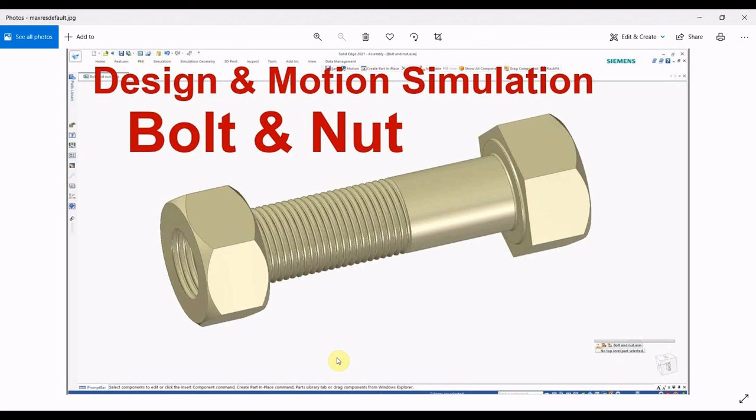So let's go to our topic. Today we are going to do the design and some motion simulation of a bolt and nut design in Solid Edge software. So let's go into the topic here. So here we are just starting the Solid Edge software. Then at first go to New, then go for New, and the

Let's go into the topic here. Here we first go to the ANSI metric option, then go to the ANSI metric part option. Here is the Solid Edge 2020 window. We can make the model in synchronous, but I prefer to do it in ordered. So let's go to the ordered option.

Then first make all the planes visible. Then go to the sketch option and click on the plane option. Okay, here we are perpendicular to this plane. Then I am just going to make one sketch. Please watch carefully. I am going to make this sketch here. Okay, that's 90 degrees, that is showing.

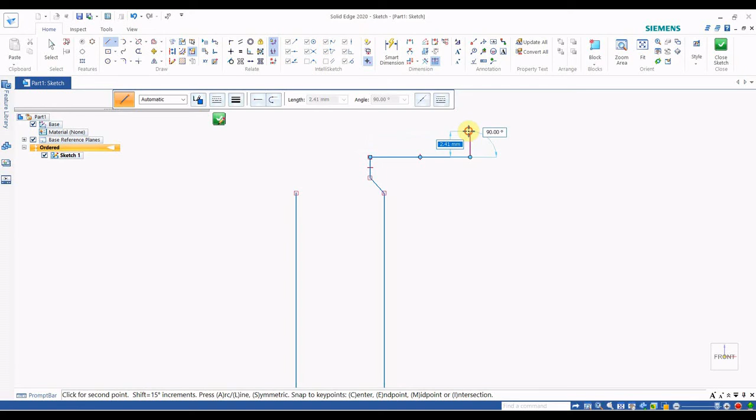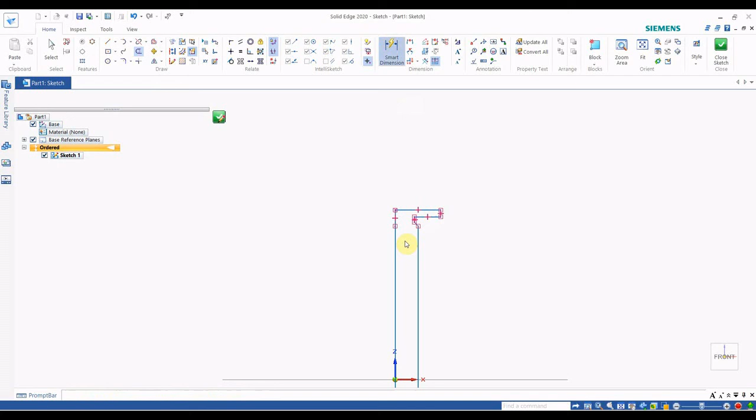After that, just make this type of sketch, and I'm just making this, and here I am just joining this part. Then I'm using the trim option here. Now it is time for giving the dimensions. So here I am giving the dimension here.

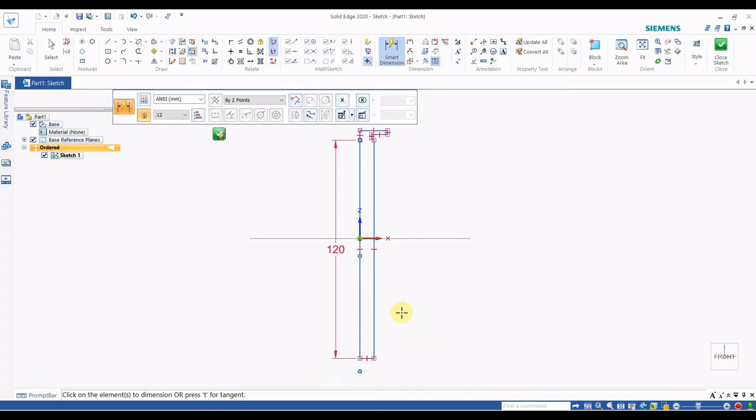Please hold the shift key and the mouse middle button to move this drawing in the window. So here I am giving the dimension 120. Here I am giving this dimension also 120, and this dimension is 10. That is for an M20 bolt.

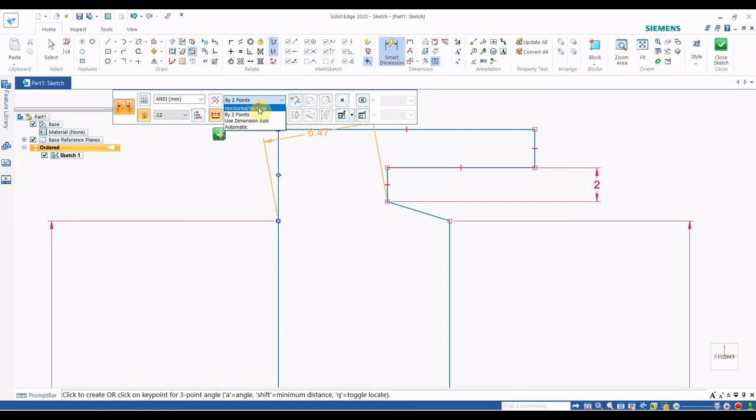Then I am giving this dimension 2 millimeters, and giving this dimension, sorry, what's the problem? I'm giving the horizontal or vertical. This dimension is around 8 millimeters. Okay, then I am giving this dimension around 5 millimeters, and this also becomes automatic with that.

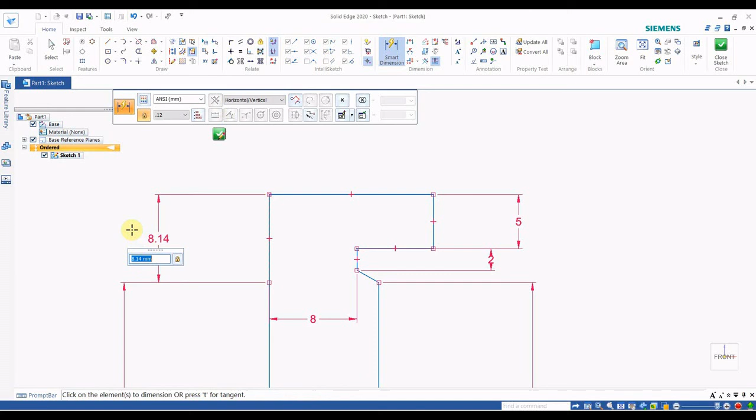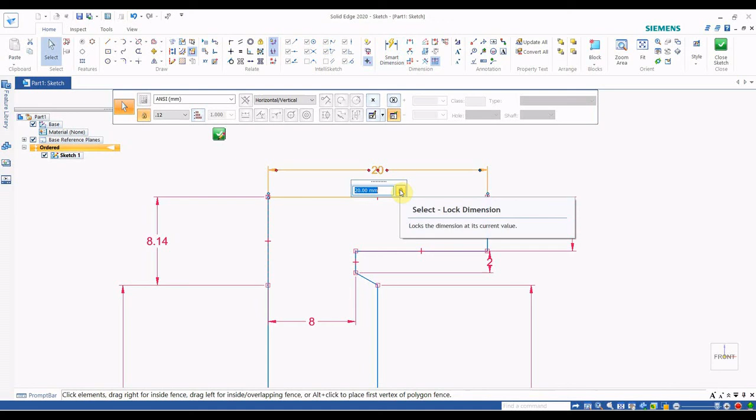And then I'm giving this dimension, the head dimension, around 20. No, 20 is very small. Giving this dimension around 50 millimeters. No, 50 is very large. One minute. I'm giving this dimension

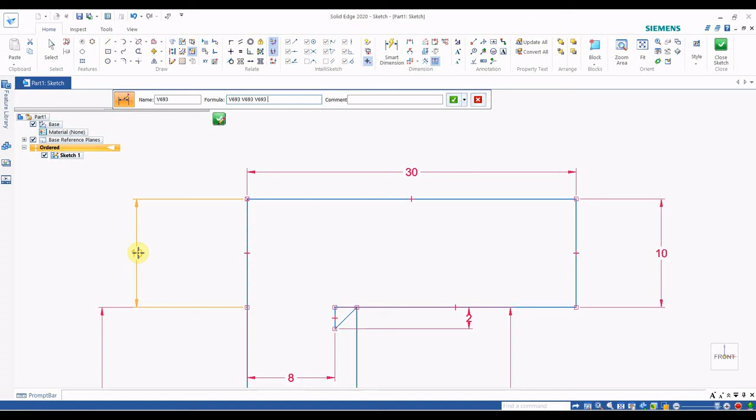around 30 millimeters. And the head dimension I am going to change, and that is near 10 millimeters. But I need to extend this part also, that also 10, that also 20 millimeters. Okay, now this is okay. So let's close the sketch. Here this is the sketch part.

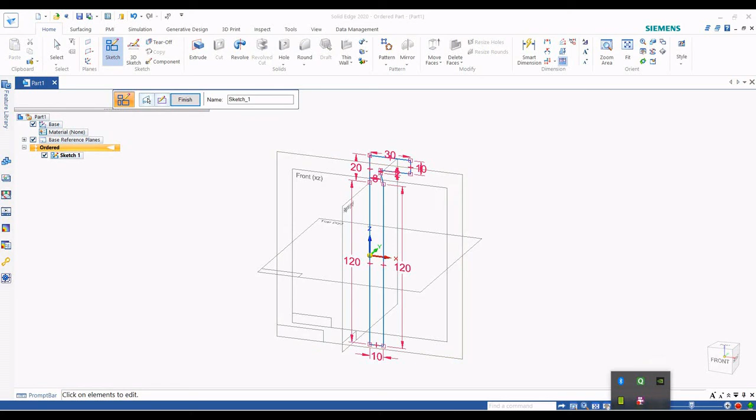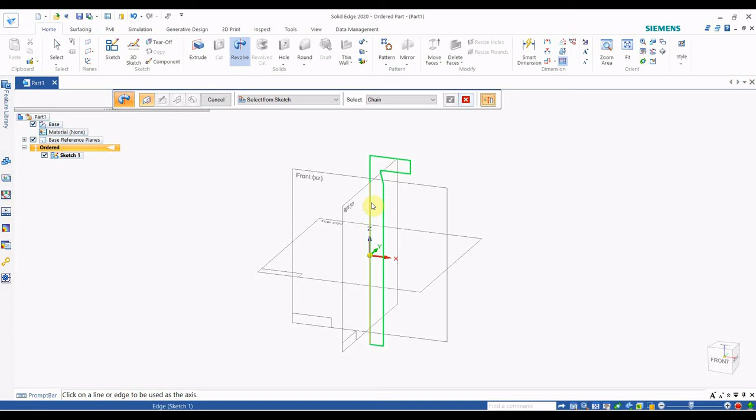Then I am going to revolve this. Go to the revolve option. Here choose the select from sketch option and select the sketch. Then green tick. Then give the axis. Give this axis and here 360. And you can see that the revolve has been finished.

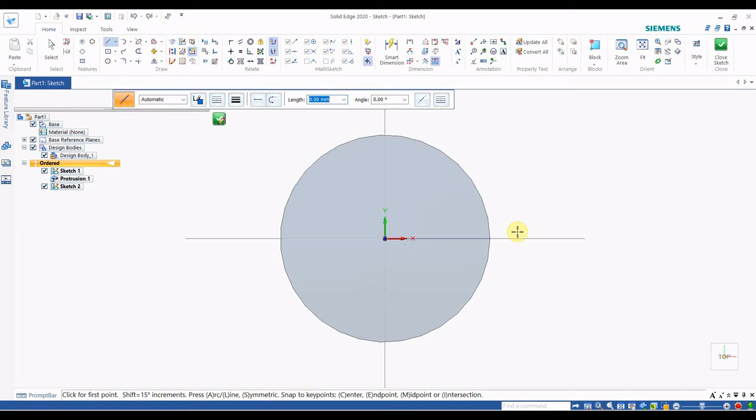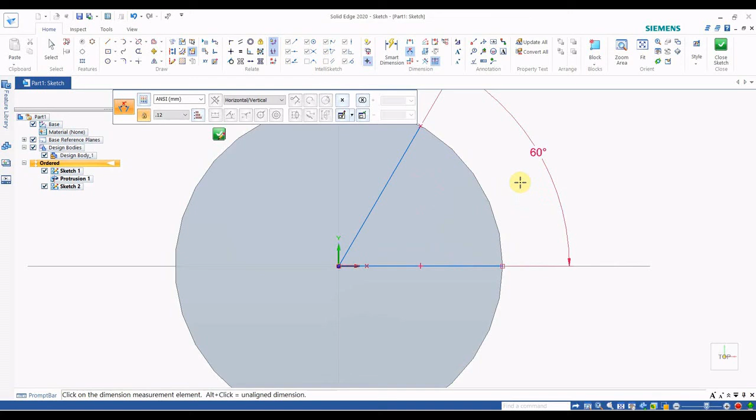Then I am going to make one sketch on this plane. Okay, here I am going to make one sketch, then click here, make one angle, give the angle dimension here, that is 60 degrees, and just connect these two parts.

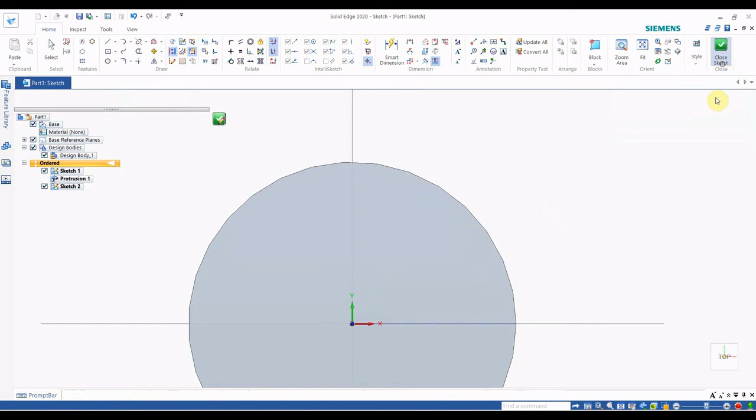Okay, then just make these two lines construction lines. Oh, sorry. Select this, make construction line. Select this, make construction line. Then go to the close sketch option. Then I am going to make one extrude cut and go to the select from sketch option.

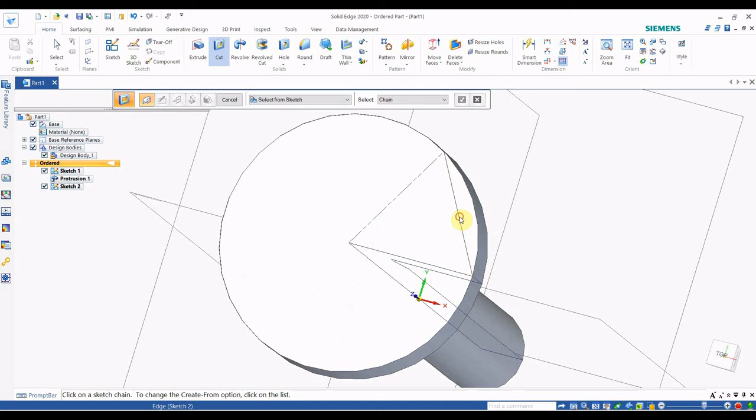It may be wrong. I need to change the sketch. Here I need to make this part using convert to curve, or project to sketch option. Okay, and then make this sketch. Okay, then go to the trim option and just hide all of that.

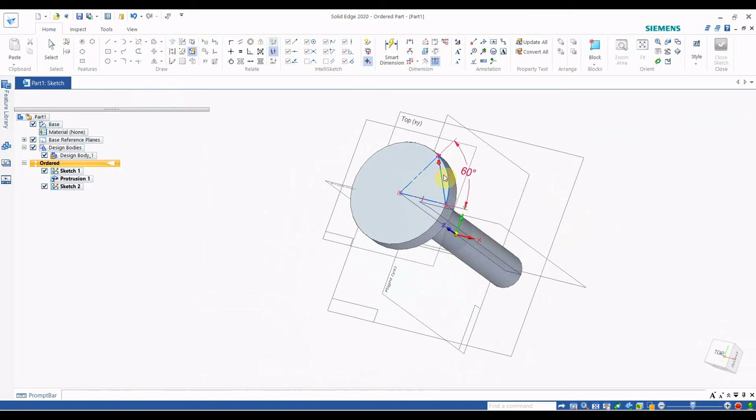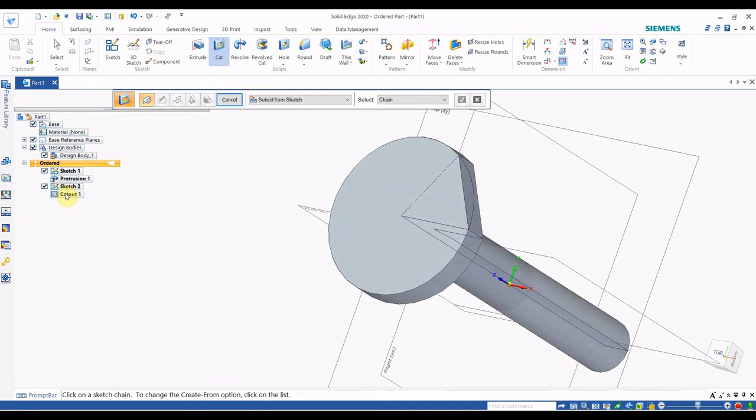Then close the sketch, and I am just making this part and just make it happen. You can see that it is finished. I am just hiding all the sketches here. Okay, then I am going to use the pattern option, that is the circular pattern. Maybe this is the circular pattern option, I think.

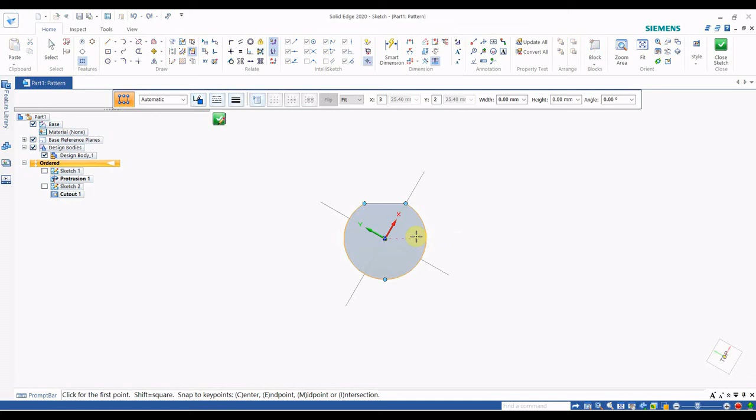Then select this feature, and that is the plane, and it is the circular pattern. Where is the circular pattern option? Circular pattern, that is the feature circular pattern option. Sorry.

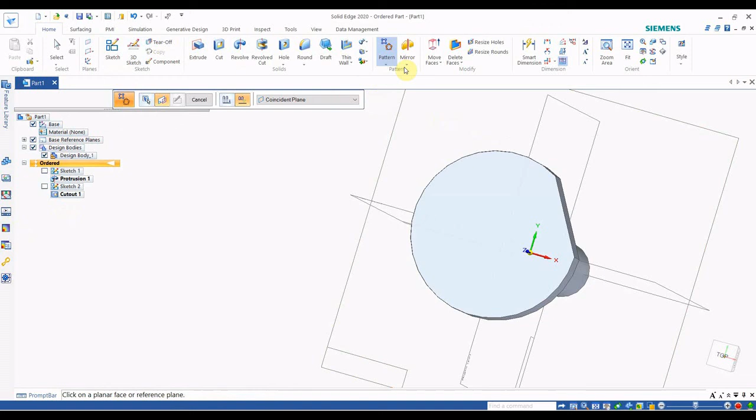In the here, or one thing, please wait. What is the circular pattern option? Pattern by table, pattern along curve. If we make one also

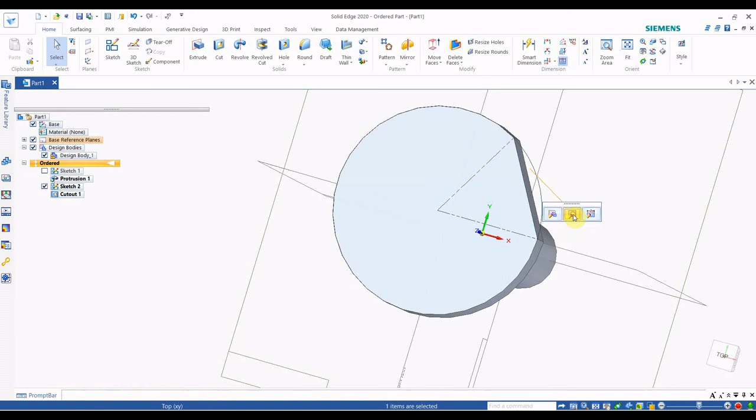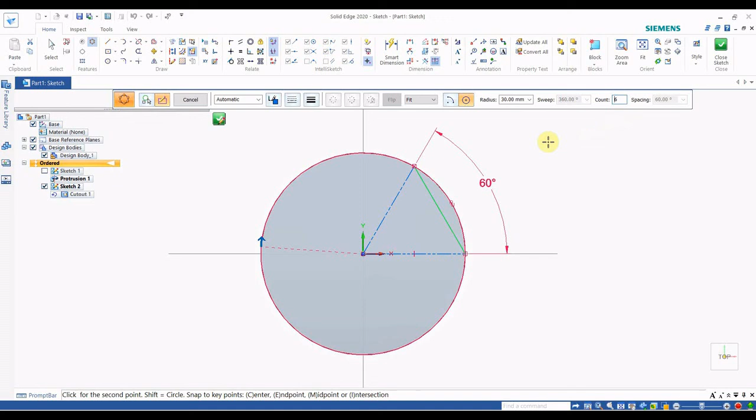Go to the sketch here and just edit the sketch. Okay, if we edit this sketch, here we can make one circular pattern, that is these two parts, and select the circle here and count 6, and you can see that we have made that sketch also.

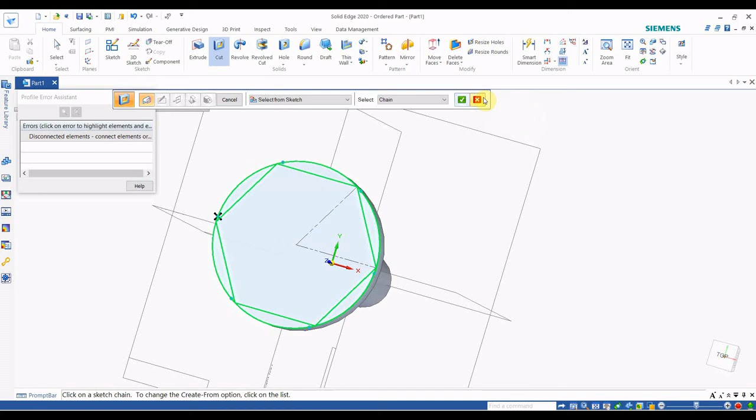Okay, no problem. Here there is some problem in making the head portion, no problem. I'm just not going to do the head portion. Okay, now I am just making the thread portion. Okay, this is the thread portion.

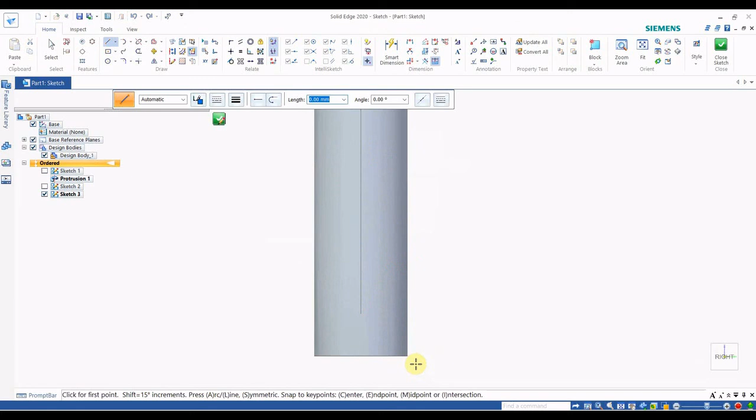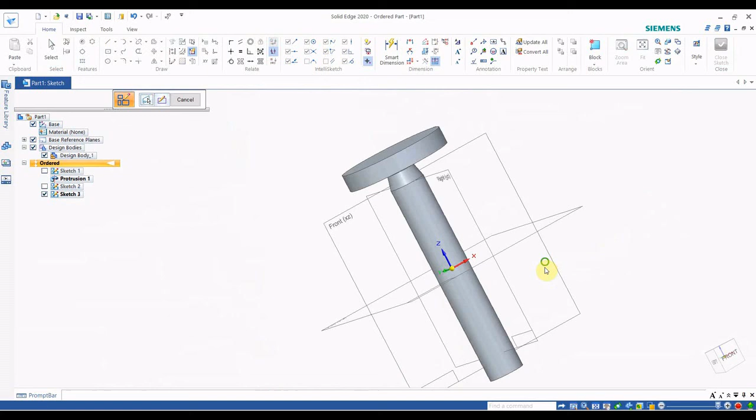Now go to the sketch and make the perpendicular option. Here I am going to make one sketch here. Please wait. 1 minute. I just need to select the right plane here. I have to go to the sketch and select the plane.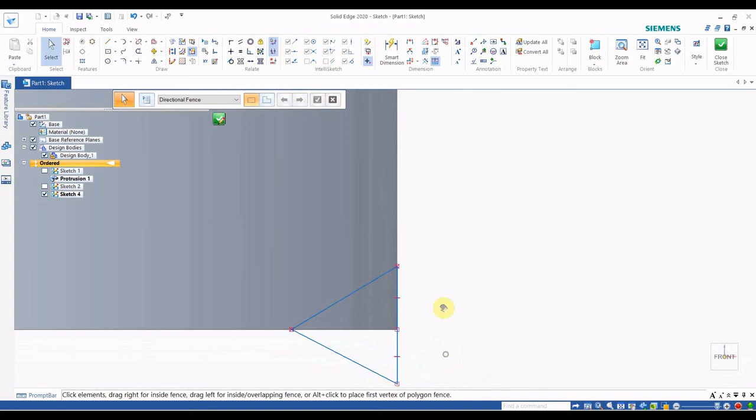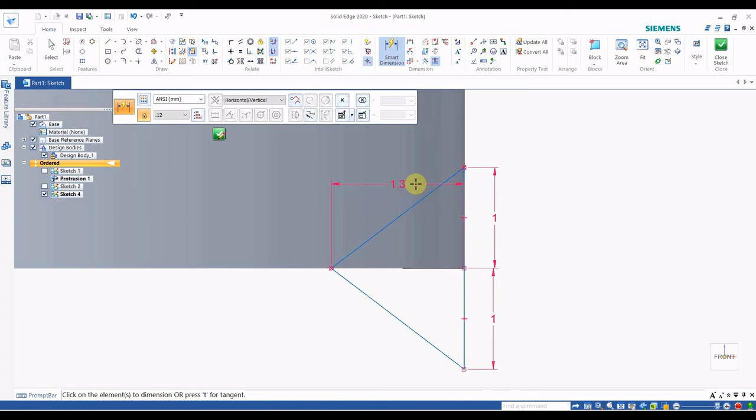Then I am going to make this part. Here I make one triangle. Okay, and giving the dimension, that is part 1. That is 1, and that is also 1. Okay, and I am giving this height also, that is 1.3.

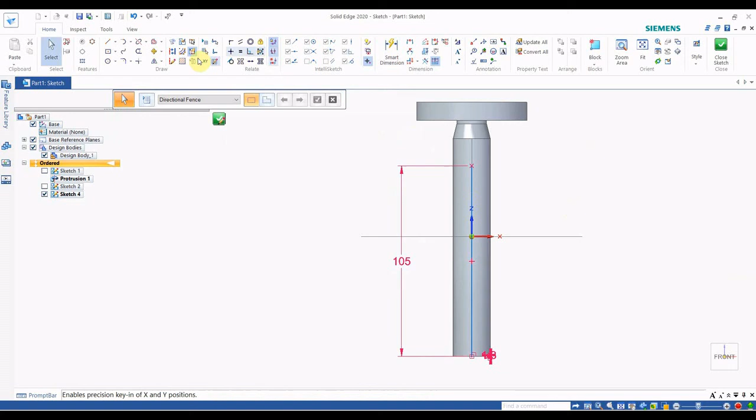Okay, now I am just making one axis here. Select this line and I am giving the axis this, and I am giving the height also of the axis, that is actual 105. Then I have made the part and just close the sketch. Then I am going to revolve it.

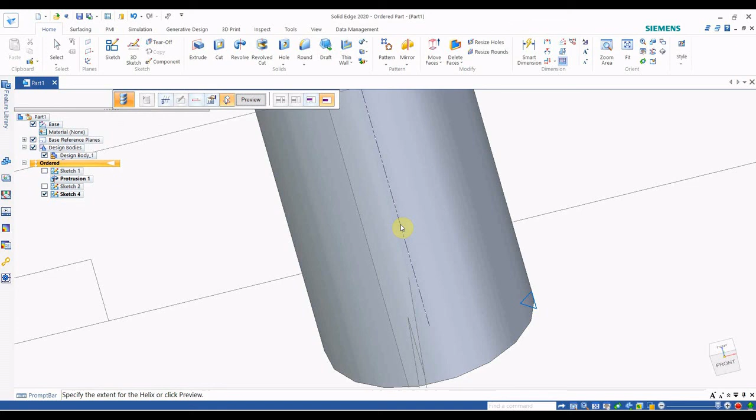Please go to the helix option. Select from the sketch and select this axis, and please select this axis also. Then go to the pitch option, give the pitch 3 and click here in the preview. You can see the thread has been built here.

Okay, and we can make two chamfers here, that is one chamfer here. Please reduce the size, that is 2 mm, and one chamfer here. Select this chamfer and select this, and you can see that I just made the chamfer here. And if you make some radius, you can select this. Please reduce the, yeah, and make the preview and finish.

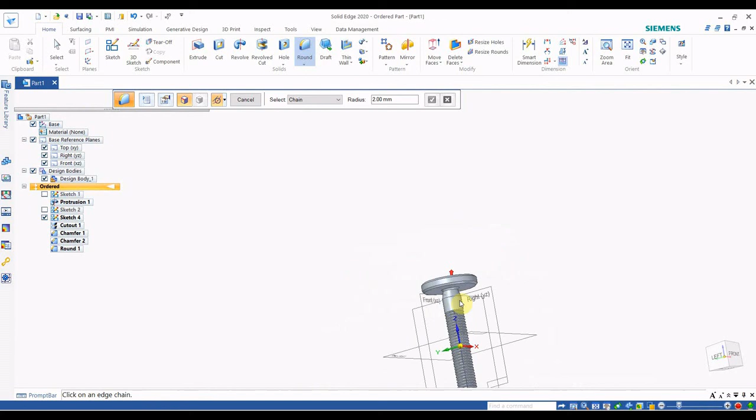In this way we can make the bolt part. Then I am going to save this bolt in my computer. That is the bolt.

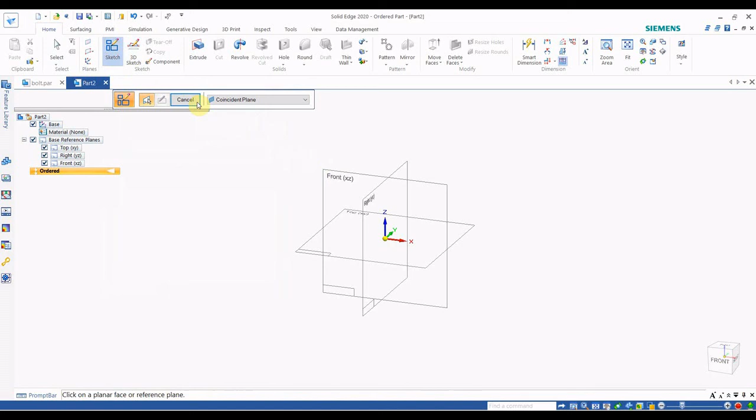Okay. Now I am going to make the new part, metric part. I am going to make the nut portion. Here please go to the ordered option and then make visible all the planes. Please select this plane and go to the sketch. Or go to the sketch and select this plane.

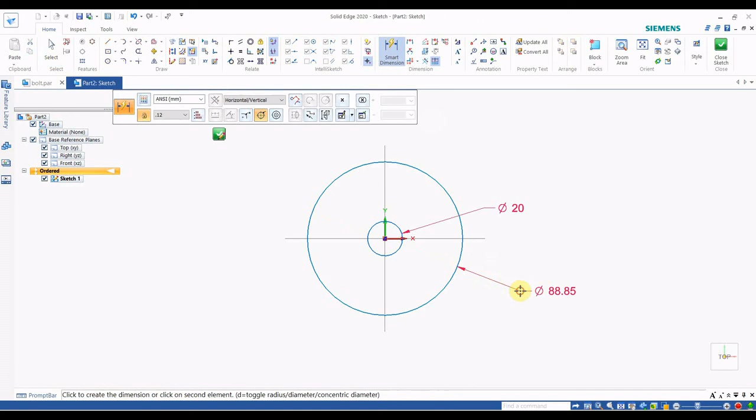Okay, now I am going to make this one and two part. Give the dimension, that is 20, and give the dimension, that is 50. Okay, let's close it, and we are going to extrude it. Select from sketch and select these and these. Click here, and I am making it symmetrical and giving the

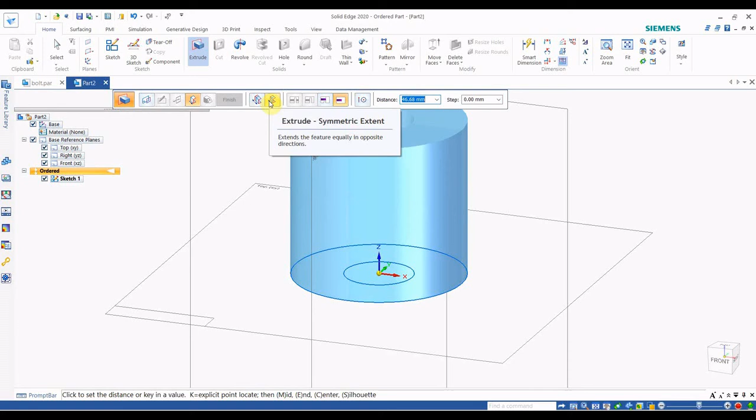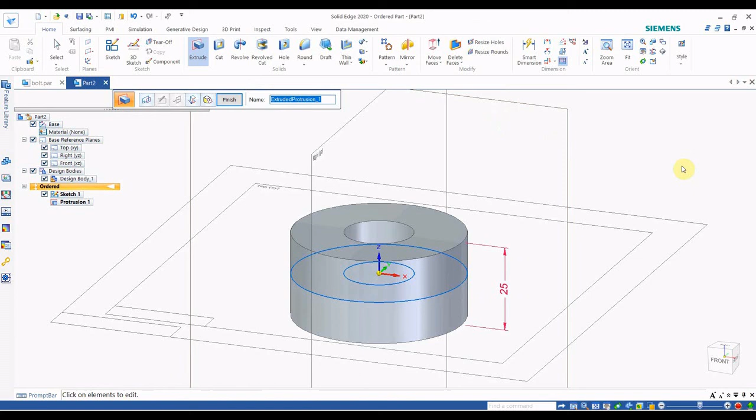thickness around 50. Oh sorry, 50 is very large. I have to change that. Then go here and make this, and if you click here you can make this 25. Okay, here. And now we are going to make two things here.

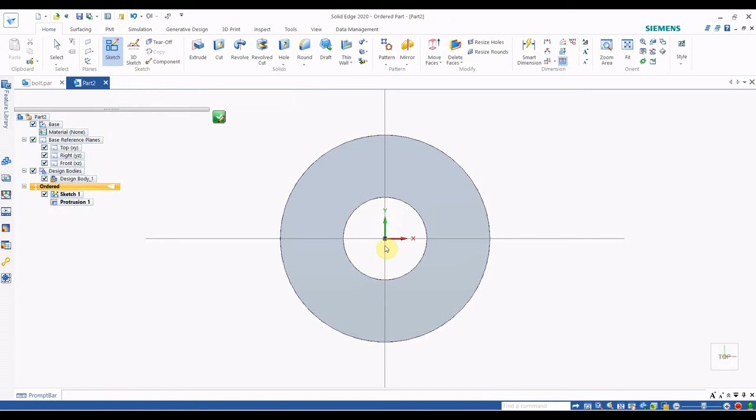Then we just make one sketch here, that is go to the sketch, select the plane, but we have to select this plane, not other plane. Close sketch. I select this plane and sketch. I have to make something here, that is first go to the project to sketch option, select this. Okay, then I am going to make something here.

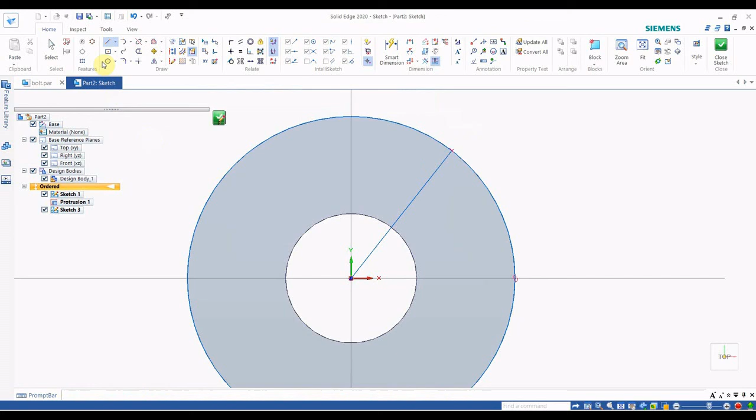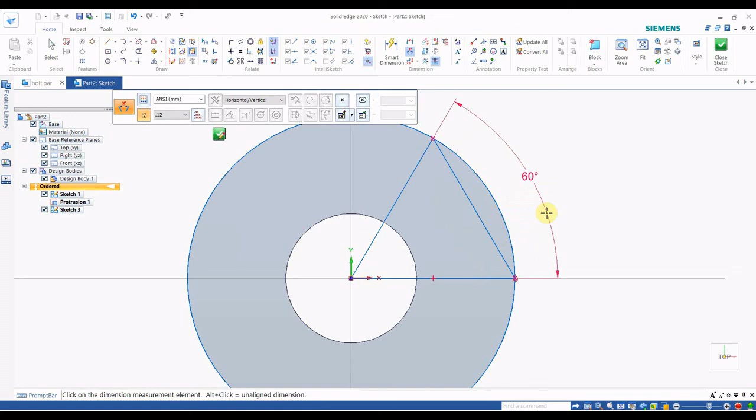I have to make here and select this. I am giving the dimension 60°. Okay, let's wait there for the angle dimension, that is 60. Okay, now I am giving one more thing, that will be also 60.

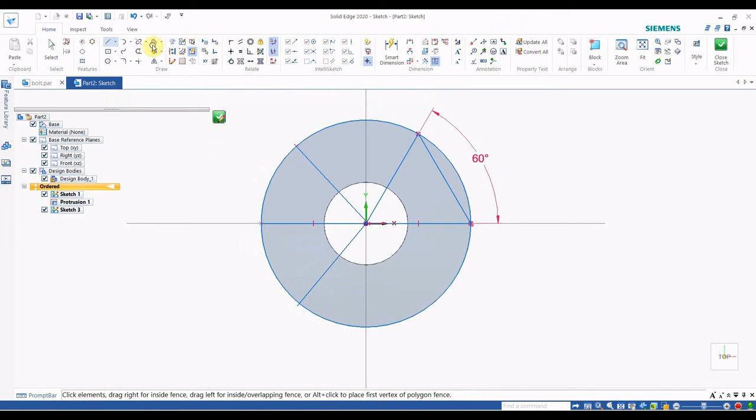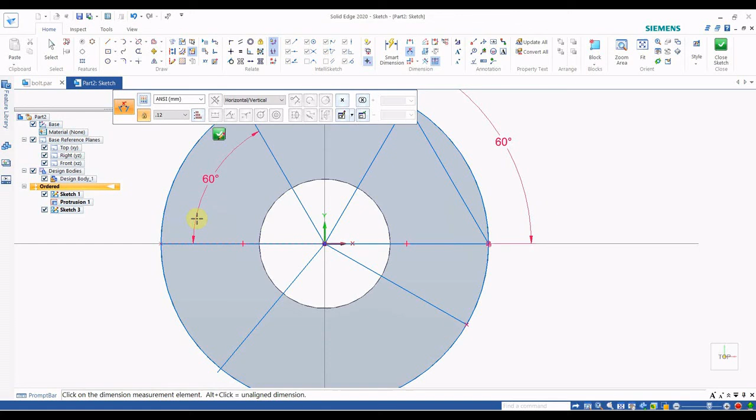That will be also 60. Here I made some mistake. I'm just going to delete this and make this line, that is, give the dimension, please give the dimension, and give the dimension. Okay, give this dimension also 60, then give dimension,

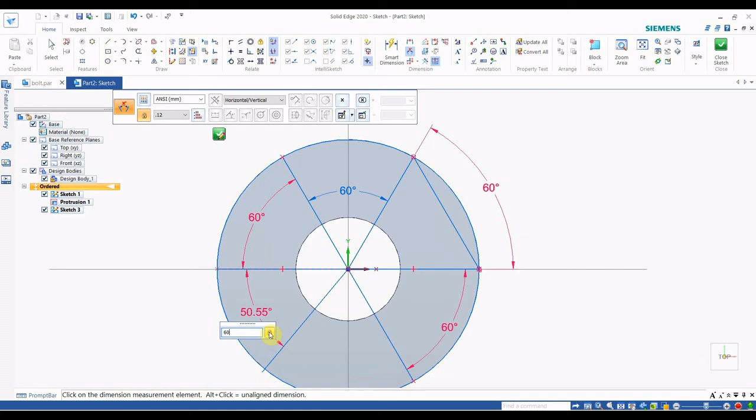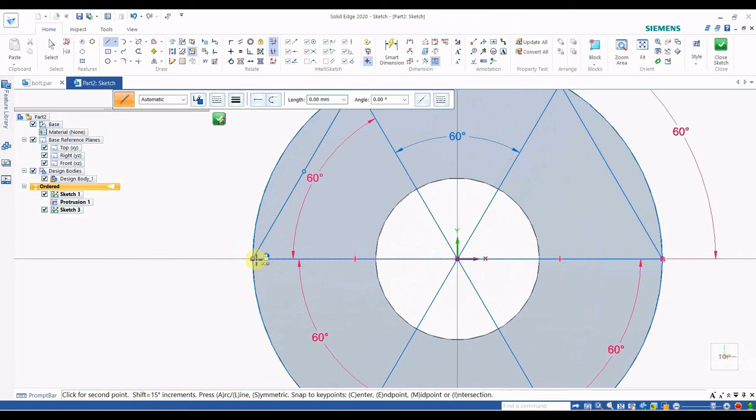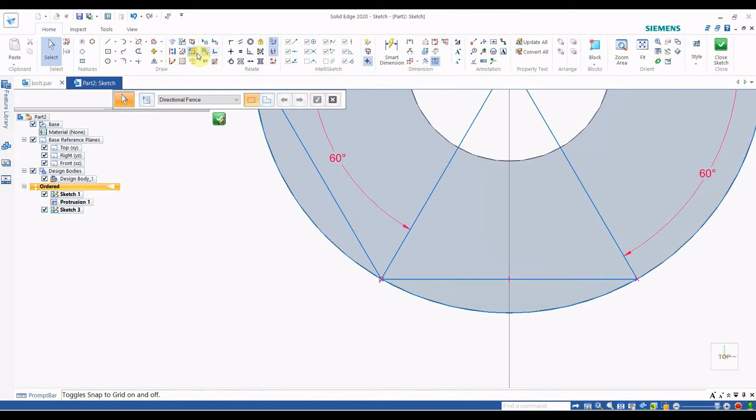60, and give this dimension 60. And if we make something here, the lines, if we connect these lines here, connect these lines here, and just use the trim option here. I'm going to trim all these lines here.

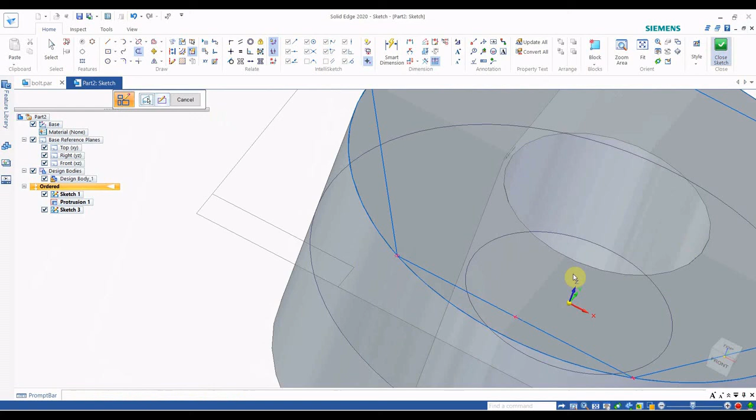Okay, I think there is some problem here, that is, select these and this option. Okay, now I have to trim one more part, that is this. Then I am trying the extrude cut. Let's see if it is making a cut. Select from sketch. Let's see. It's telling that this profile intersects itself.

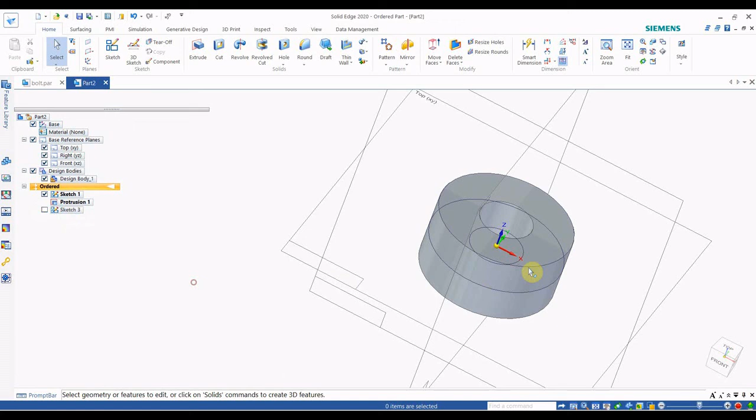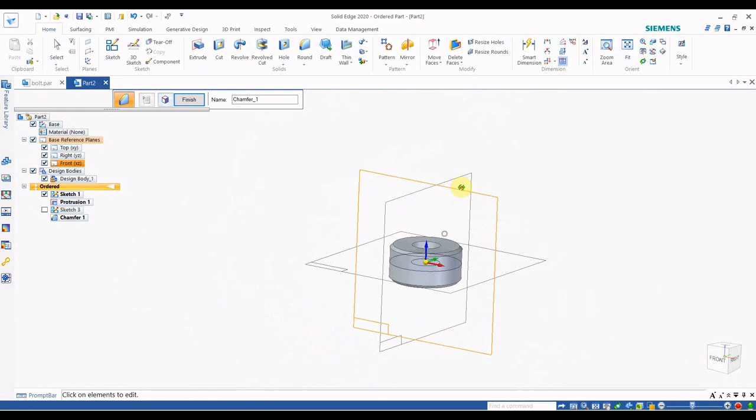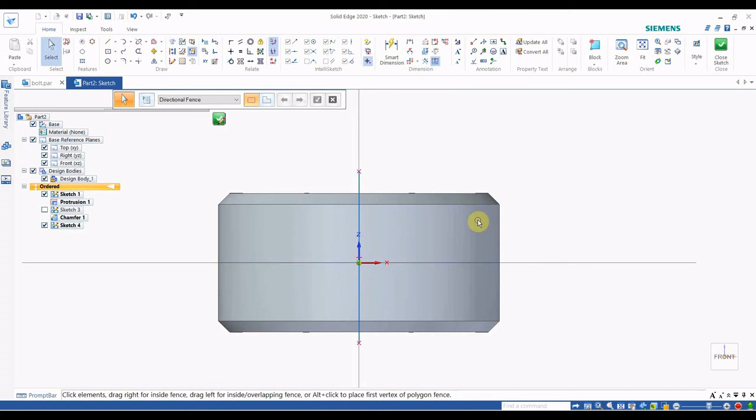So I'm not making the hexagonal shape. I am just making one thread here. Okay, make the two chamfers here, one chamfer here, another chamfer here, and I'm just making one thread here. Just select the sketch, or select the plane, and we have to make one axis. The axis should go through all of these. This will be the axis, and I have to make one thing, that is the 20. Okay, no problem.

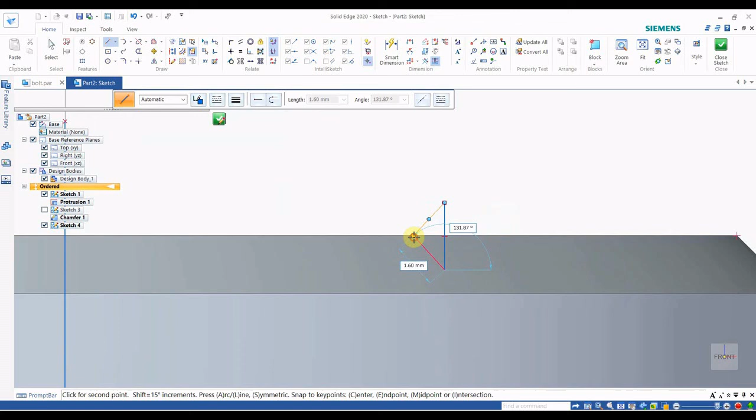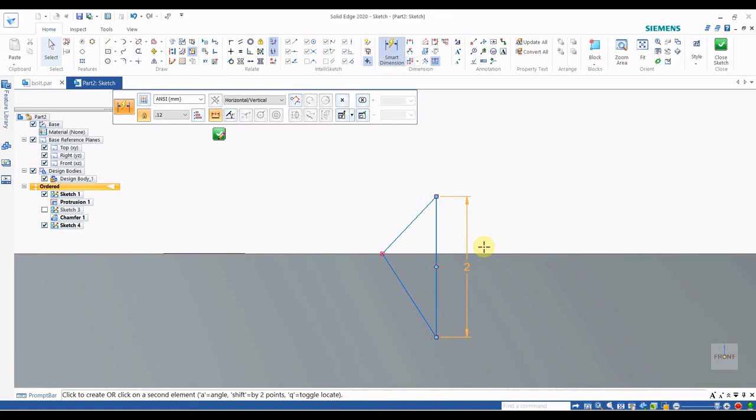I'm going to make this part, giving its dimension as 2 millimeter, from this point to this point. What's the problem? Selecting these two points, one point this, another point this. Okay, horizontal and vertical, that is 1. Okay, that is okay. And the distance between these is 1.3.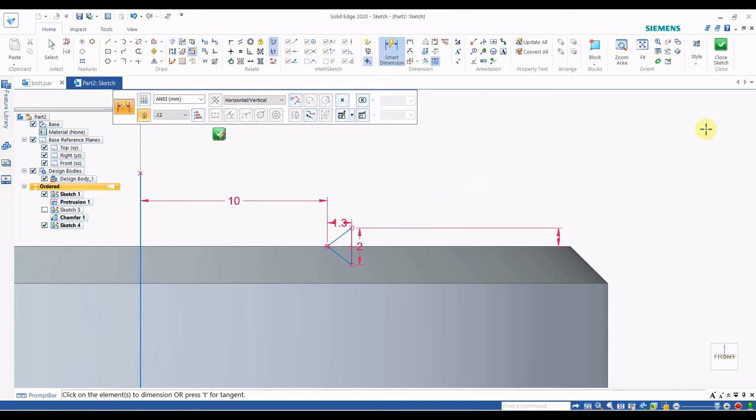Okay, and I am giving one more distance here, this point to this is 10. Now I'm closing this sketch and making the thread part. Going for the helix option, select the sketch, click here and select this axis. Give the pitch 2 and make the preview. Boolean operation on solid failed. So I am trying again to make the helix.

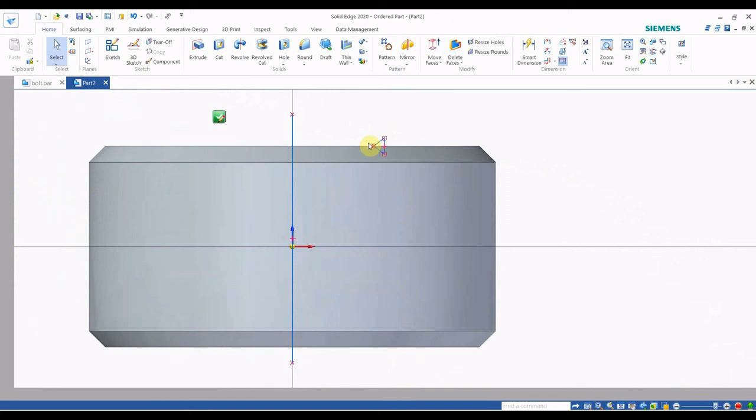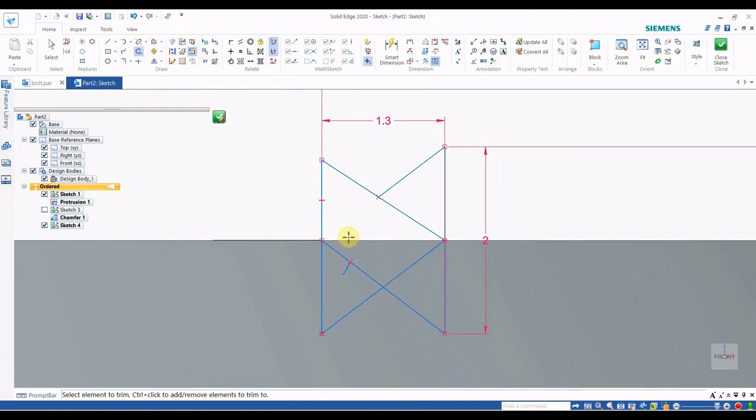Oh, it may be I made this from outside, I think. I have made the drawing outside. Sorry, I have to change this. So this will happen like that. Okay, this will happen like that. Sorry, I need to cut these lines. And this will happen like that. I think then we can make that, maybe.

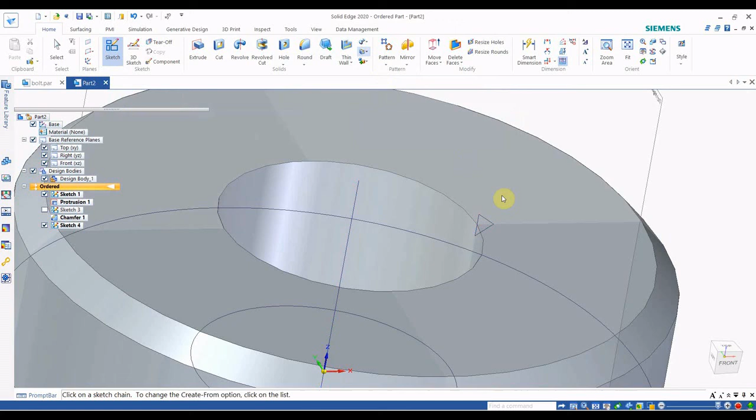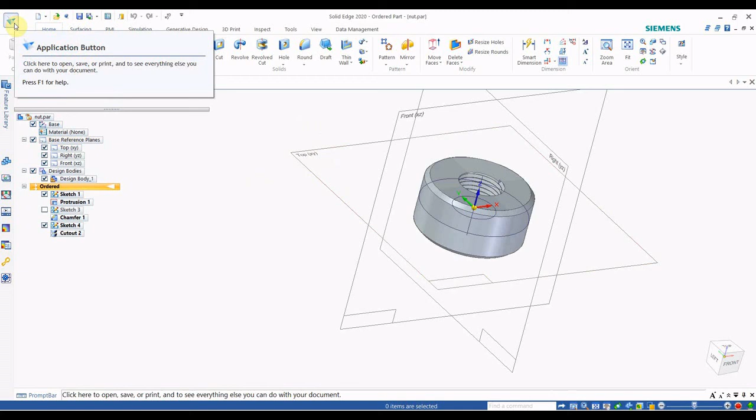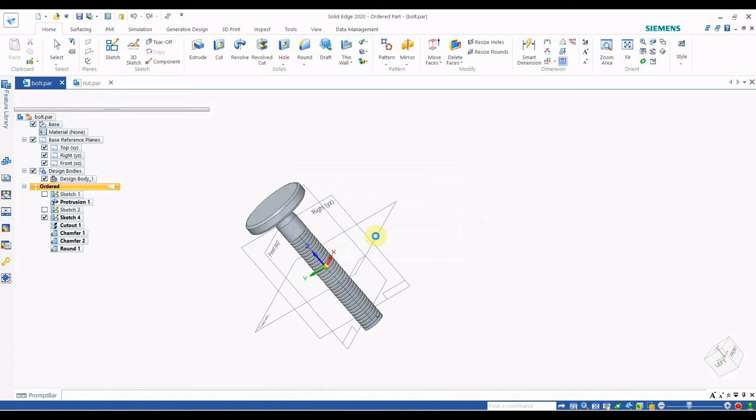Let's try. Go to the helix part, select the sketch, click and select this axis, 2 mm, preview, and you can see that I have made this thread part. Okay, now I'm going to save this as the nut. Now I'm going to make the assembly. Go for the bolt first, then go to new, assembly of the active part, and OK. You can see in my assembly the bolt has already come.

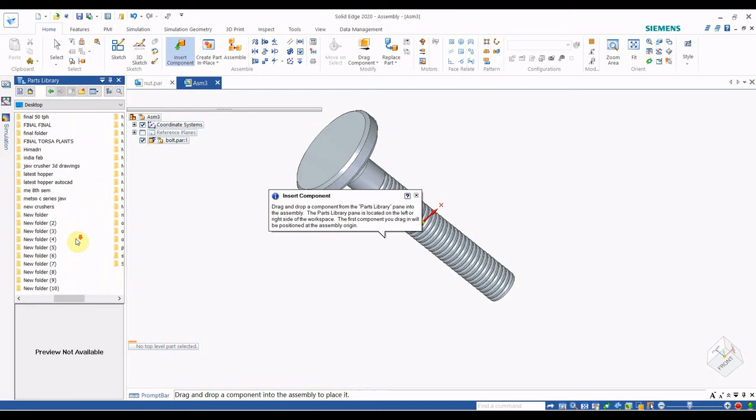Then I am going to insert the nut part. Go to the desktop, where there is the bolt part. Here is already the bolt, so I need to delete this, then add the nut. Here is the nut. Okay, I'm just giving the relationship here. Go to the mate option. One minute.

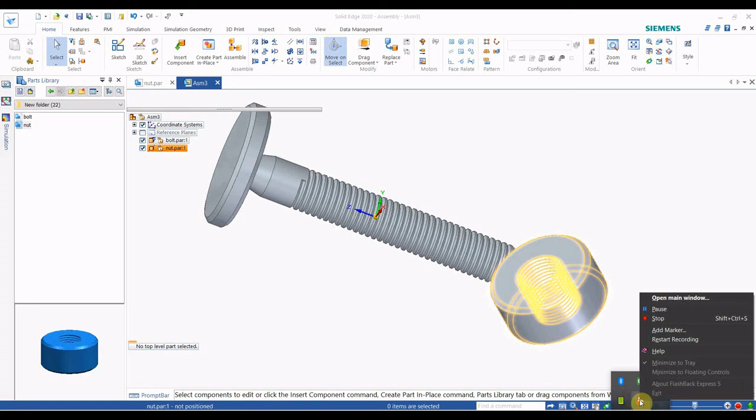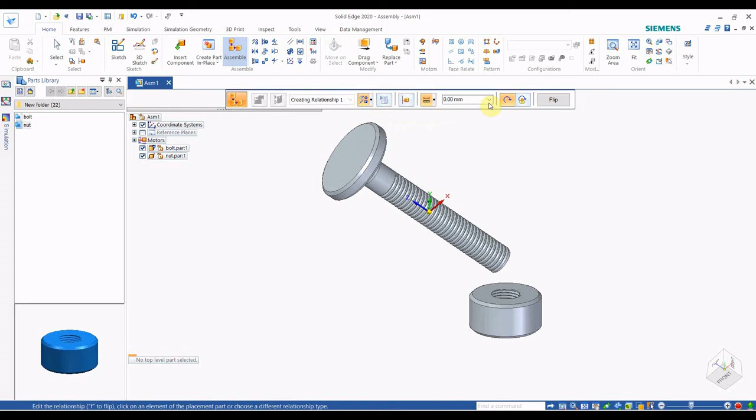You can see this is the bolt. After that we import the nut here. After getting the nut, go to the assemble option. There the mating options come, then select this and this, and it's automatically concentric. Then just click here or press escape. Here you can see this.

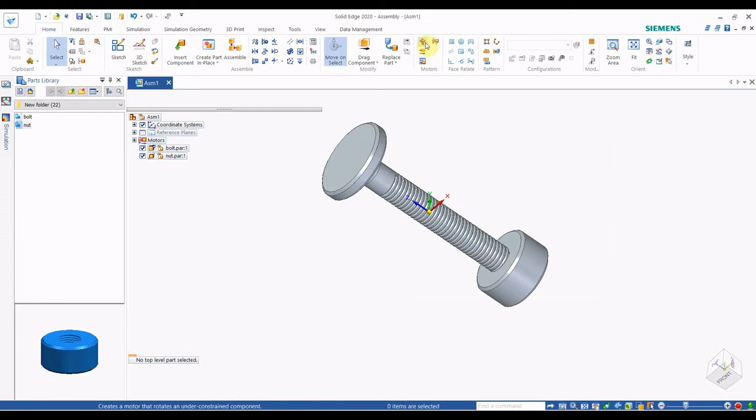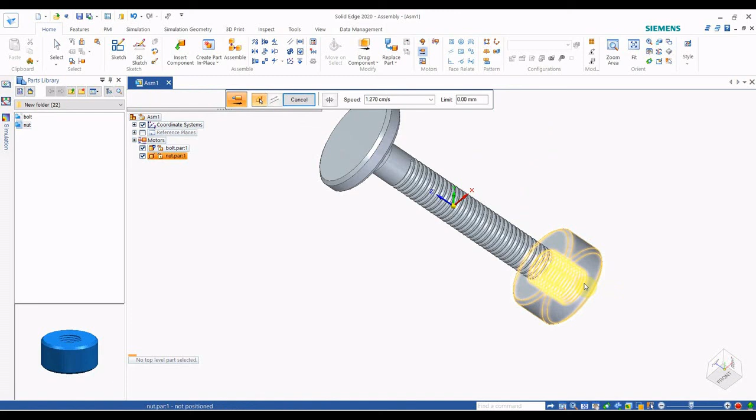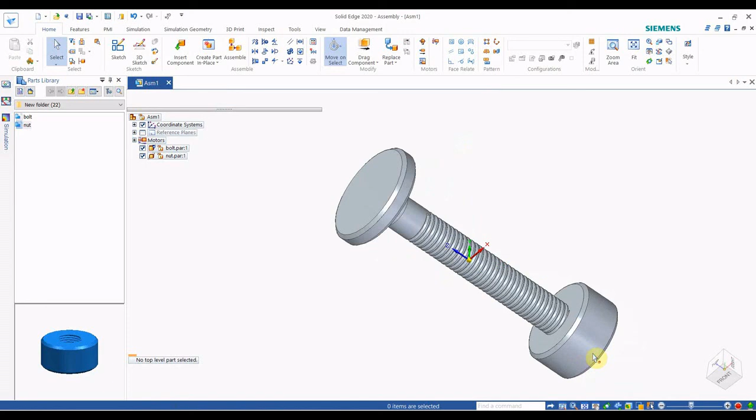Then to give the motion, go to rotary, select this and give the axis and give the direction 360 and cancel. Then select the linear option, select this and this, flip the direction and give this 70 mm. Okay, and cancel. Here is the bolt, here is the nut, and if we run the simulation here, you can see it rotate and come to the part.

This is how we can make the simulation of the nut and bolt and give its motion. You can see that. How can this be repeated? You can see that once more here. This is how we can design an assembly of the bolt and nut.